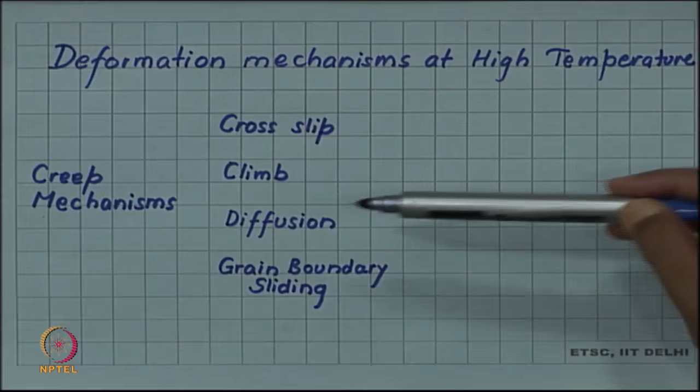4 important mechanisms have been identified: cross slip, climb, diffusion and grain boundary sliding. Cross slip, as you know, is of a screw dislocation, and climb is of an edge dislocation. So both involve dislocation, they are still dislocation based. Just like at low temperature dislocations play an important role, at high temperature also they still play a role in creep.

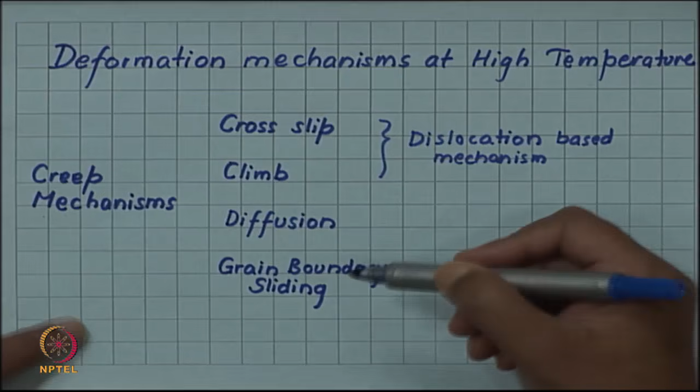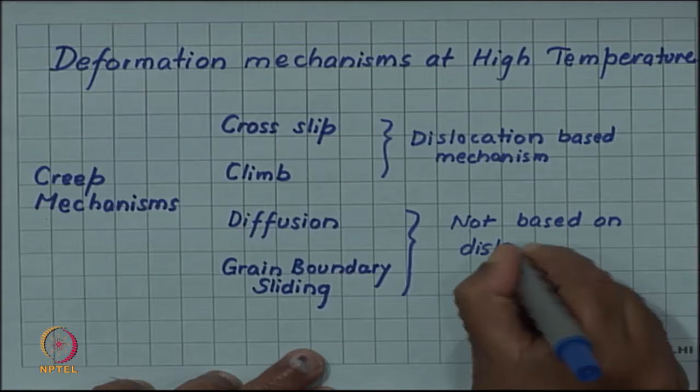But diffusion and grain boundary sliding are 2 mechanisms of plastic deformation which are not dislocation based, independent of dislocation, and they occur only at high temperature and do not happen at low temperature. So they are particularly effective in creep. These are not based on dislocations. So, high temperature deformation need not necessarily be a dislocation based deformation.

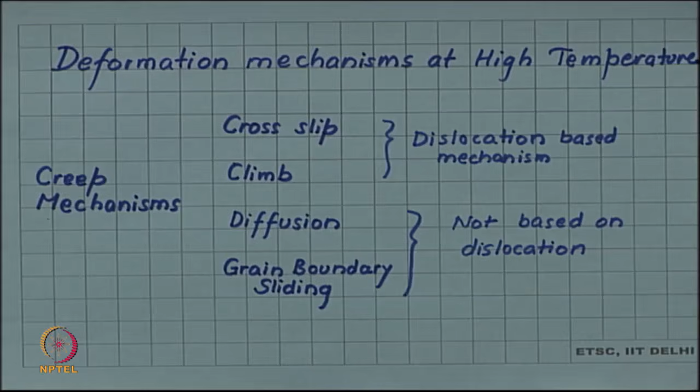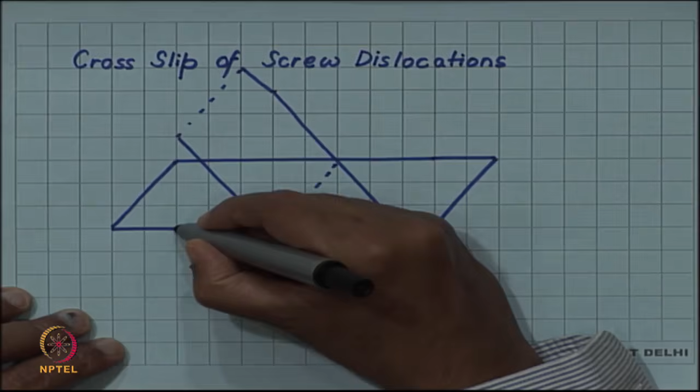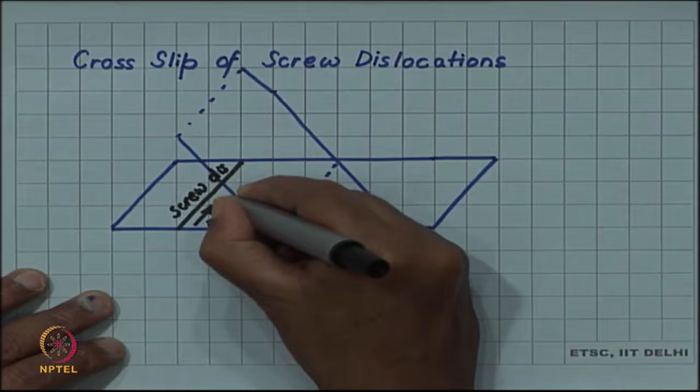We have already seen cross slip of screw dislocations when we were discussing the topic of defects and dislocations. So, let us say that this is a screw dislocation which was moving. If it is a screw dislocation, the T and B will be either parallel or anti-parallel. Let me make it parallel in this case.

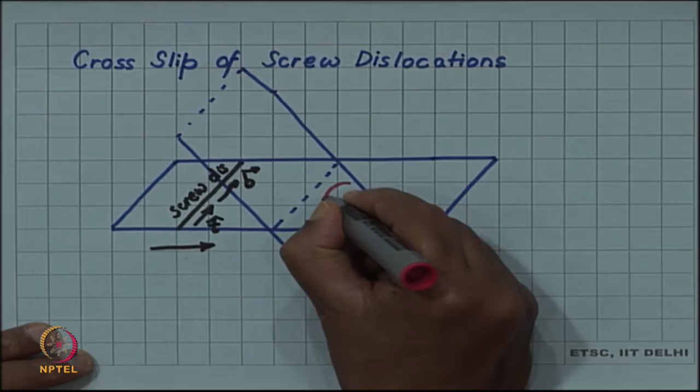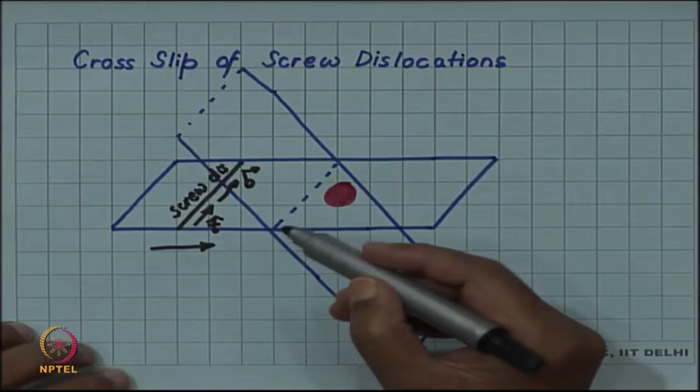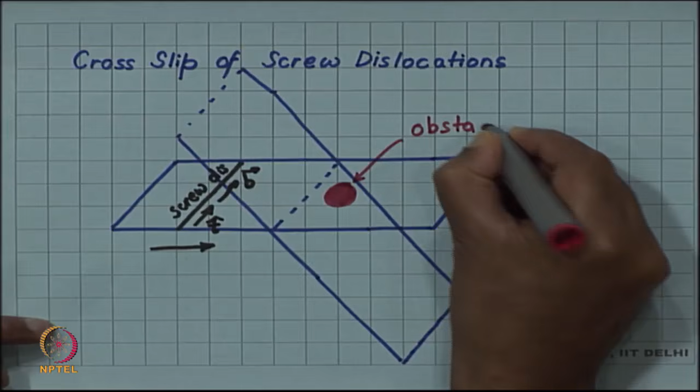So, if this dislocation was moving under stress in this direction, suppose the crystal contains some hard particles, reinforcement or precipitate, as we have talked about in precipitation hardening. Suppose there is a precipitate sitting there and the dislocation cannot cut through the precipitate, so it acts as an obstacle to dislocation motion, let us say a precipitate.

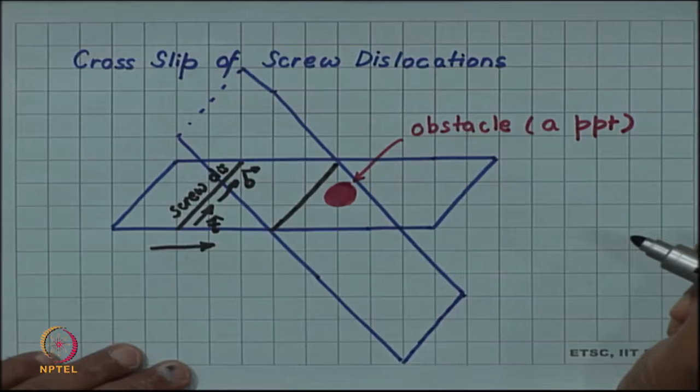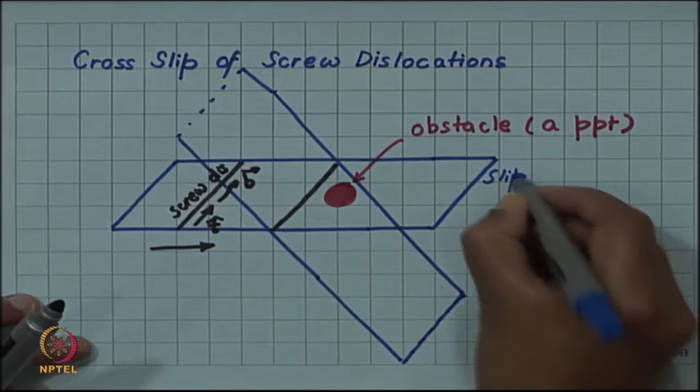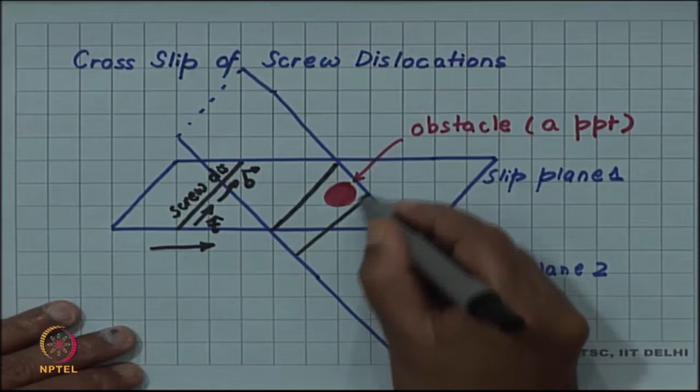So, this dislocation will be obstructed when it comes here, but if another plane is available for sliding, the dislocation can avoid this obstacle, if it is a screw dislocation. This other plane is also a slip plane. So, if this is slip plane 1, and this is slip plane 2, the dislocation can avoid the precipitate particle by starting to glide in this direction. This change of the slip plane is what we call cross slip.

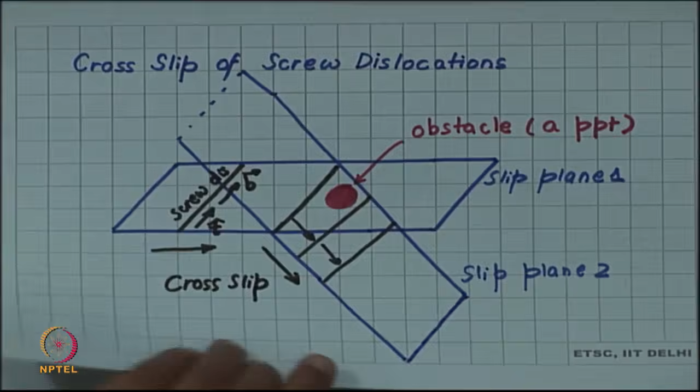So, if cross slip was not happening, the plastic deformation will stop at this point, but if cross slip is possible, then since the dislocation continues to move on a different plane, the plastic deformation will continue.

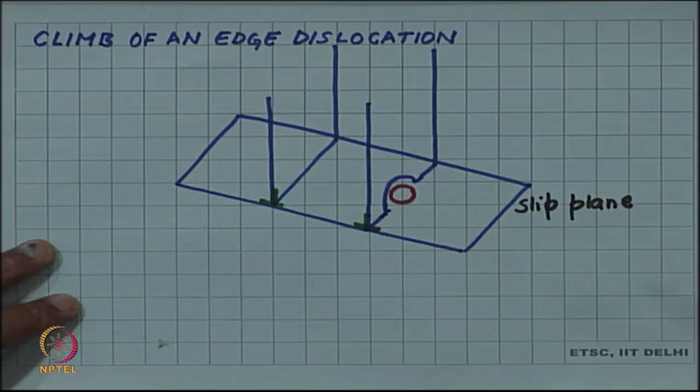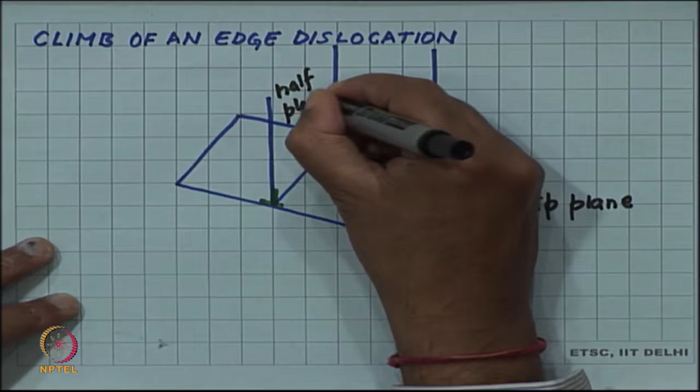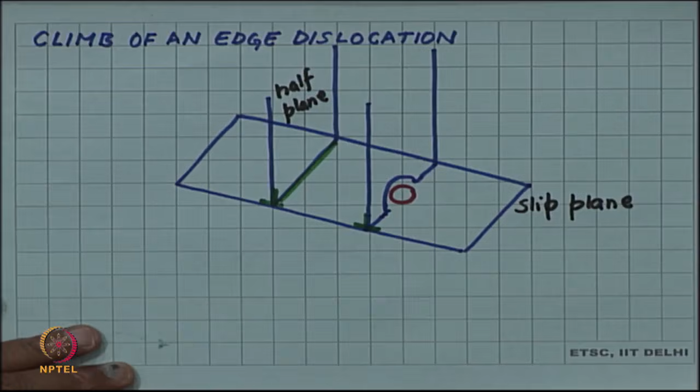Another mechanism is climb of an edge dislocation. We have shown a slip plane here, let us call this the slip plane. This horizontal plane shown here is a slip plane. The vertical plane which I have drawn here is the half plane of an edge dislocation. So this line will be the edge dislocation line, and schematically we can represent it by an upside down T. So, that is an edge dislocation.

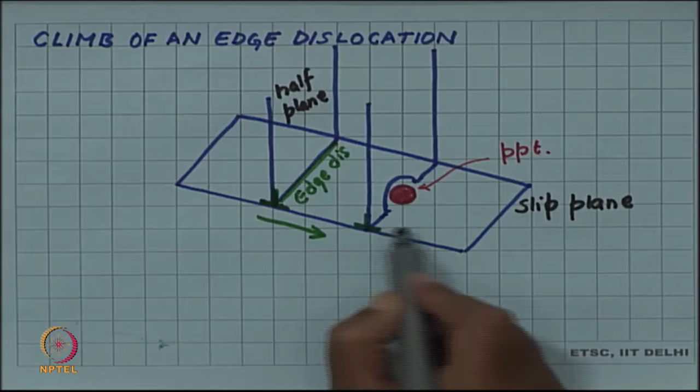And that edge dislocation, let us say, is moving in this direction, and again there is a precipitate particle sitting on the slip plane. Then in the normal situation, the dislocation will be stuck by this precipitate particle and can continue to move only at a higher stress.

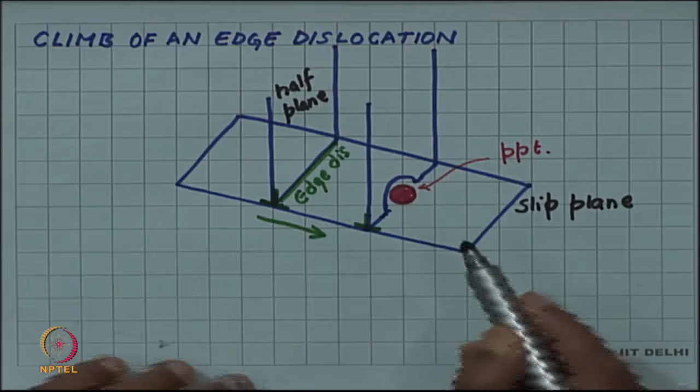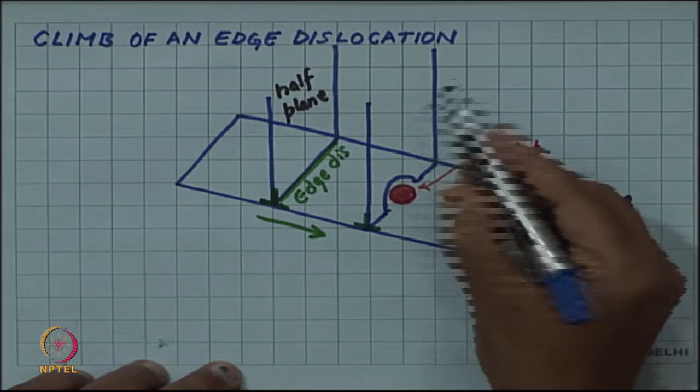We had considered that in precipitation hardening. Either the dislocation will have to cut through the precipitate, which also requires higher stress, or it can form a loop around the precipitate, which again needs higher stress. But if the temperature is high, like in case of creep deformation, then what can happen is that atoms at the bottom edge of the dislocation line can diffuse out.

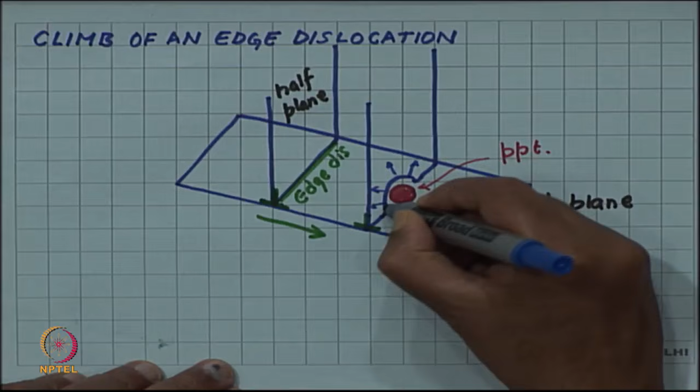Which is what we call climb up. So, this segment of the dislocation line has climbed up, and thus is able to avoid the precipitate, and the dislocation line can continue to move. This does not require any higher stress, only requires a higher temperature for this diffusion to happen.

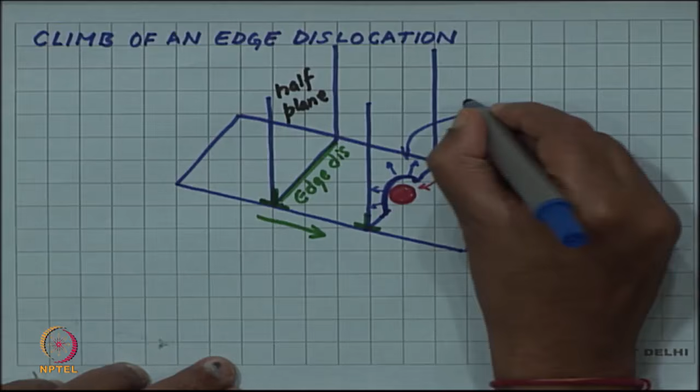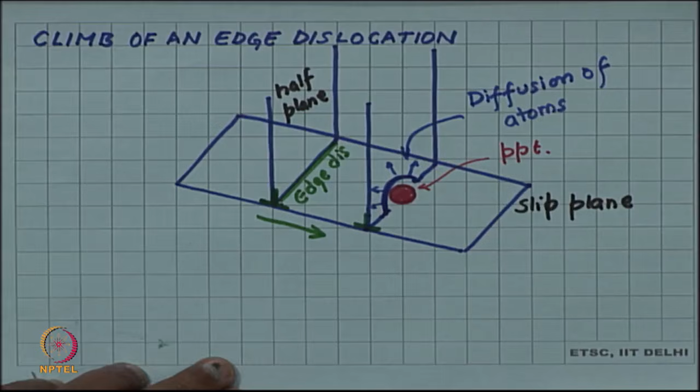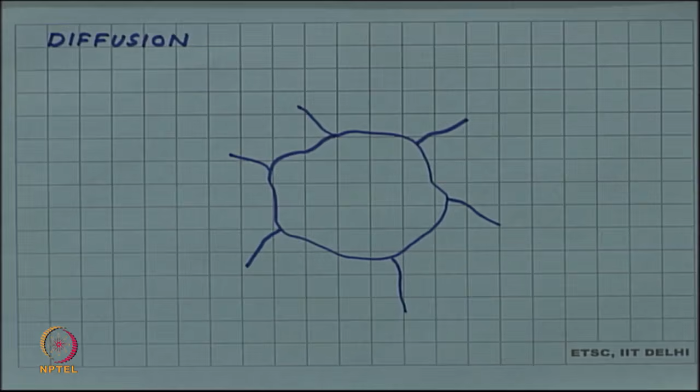So, diffusion of atoms are involved in the climb of edge dislocation. Now, a dislocation free mechanism is so-called diffusion, sometimes called diffusion creep or diffusion flow.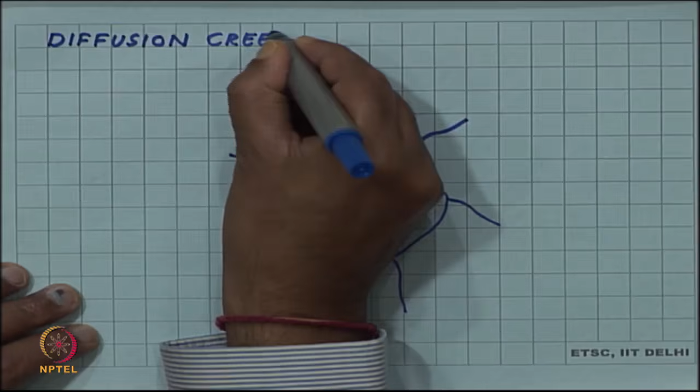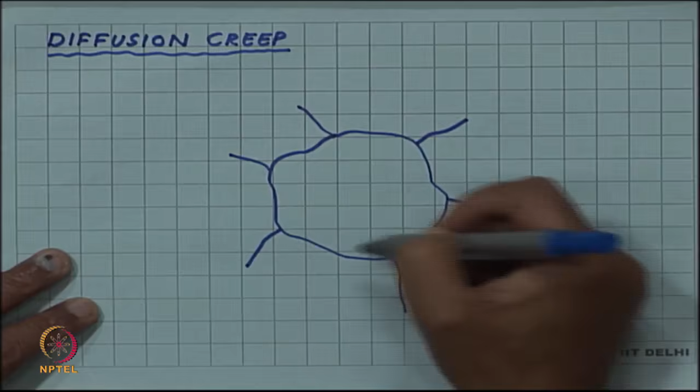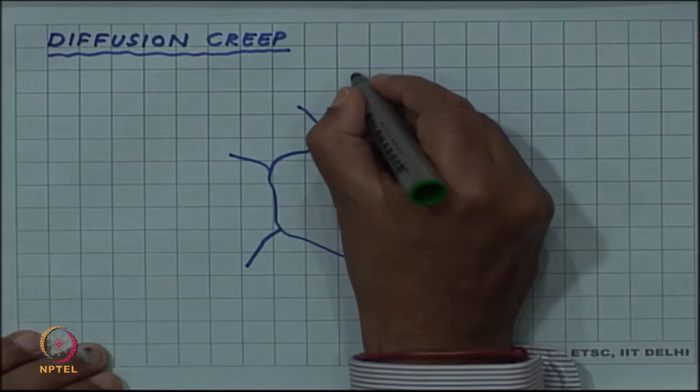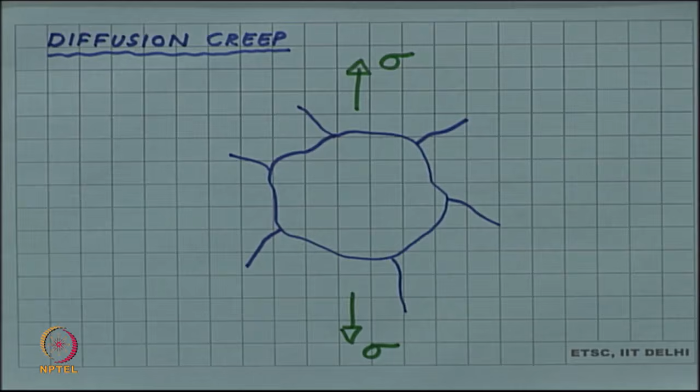So, suppose this is a schematic of a grain, and these are all grain boundaries, and if this grain is subjected to a uniaxial tensile stress, then you know that the grain will try to elongate in the direction of the stress, whereas it will try to compress in the direction perpendicular to the stress. This elongation and compression can of course be obtained by dislocation motion, as happens at low temperature.

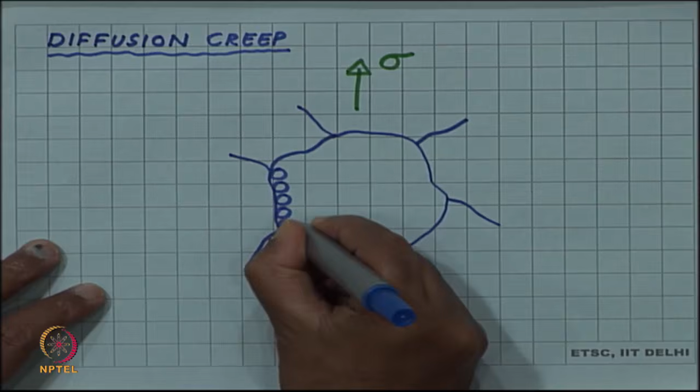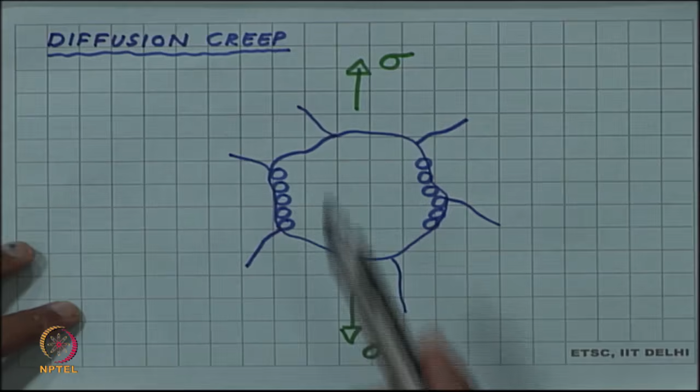But at higher temperature, since diffusivities are higher and atomic jumps are easier, one mechanism which is possible is that atoms which are on grain boundaries parallel to the stress axis can move to grain boundaries perpendicular to the stress axis.

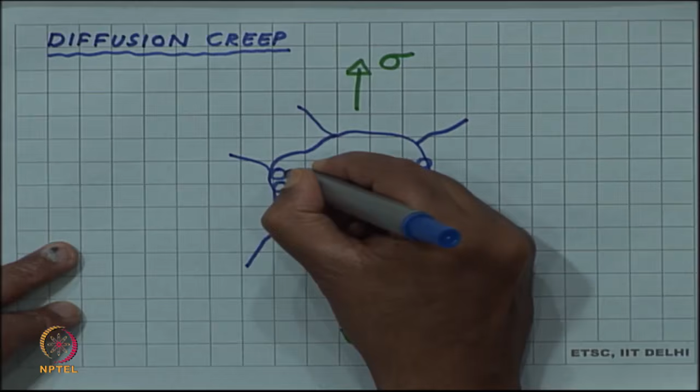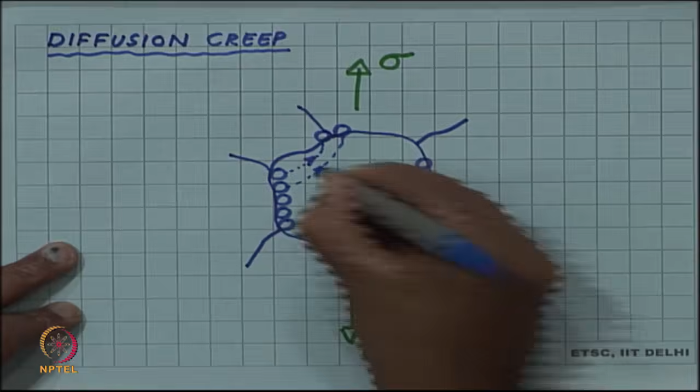So, if this atom moves from here and joins here, this atom moves and joins here, similarly this atom moves and joins here. So, let us say atoms migrate this way. If these atoms migrate and join, then similarly on this boundary we can have atoms which have migrated from this side.

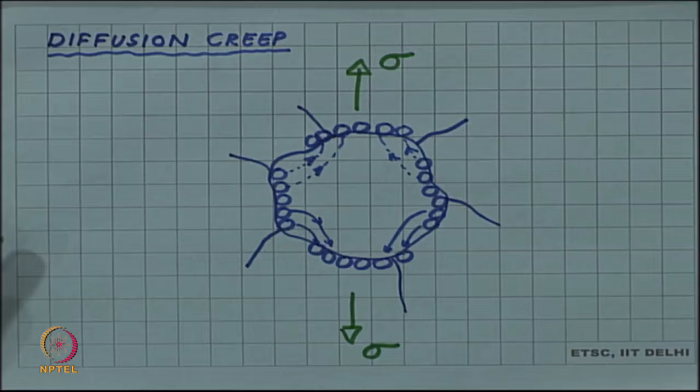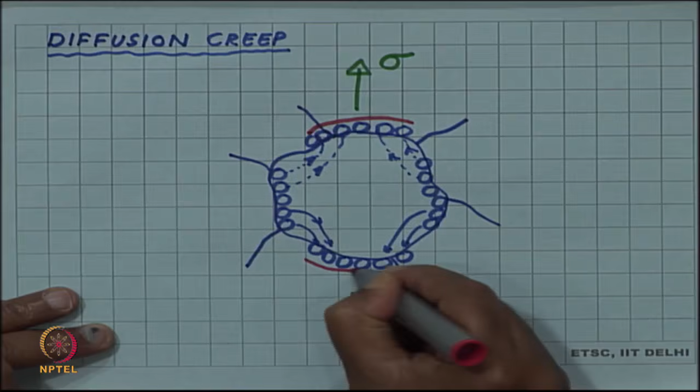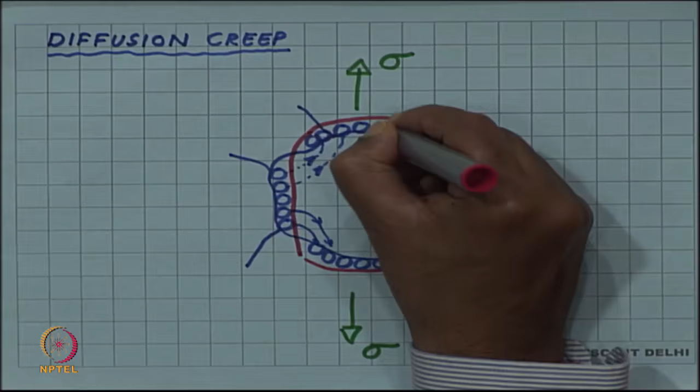So, if this happens, then you can see that the size of the grain is increasing along these boundaries, but is decreasing on this side. So, after the diffusional migration, the grain shape will be something like this, which is exactly what this stress is trying to do, to increase the length in this direction and contract the dimension in this direction. So, this increment in length as well as transverse contraction can simply be achieved if the atoms migrate in this way.

Such migration is not possible at low temperature, but at higher temperature, due to higher atomic mobility and higher diffusion rate, such migrations are possible. This is a diffusion which is not governed by Fick's law in the simpler form which we had talked about.

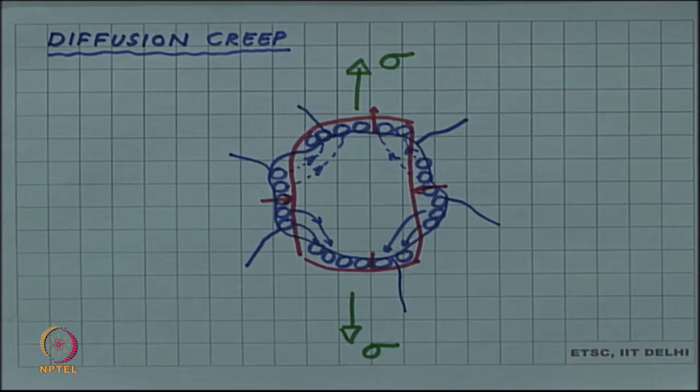That is diffusion due to concentration gradient, because there is no concentration gradient here, only stress is applied. So, this is a special kind of diffusion which we have not talked about earlier, and we are not going to discuss it in detail here either, but we will simply note that this is a special diffusion mechanism which is stress assisted diffusion.

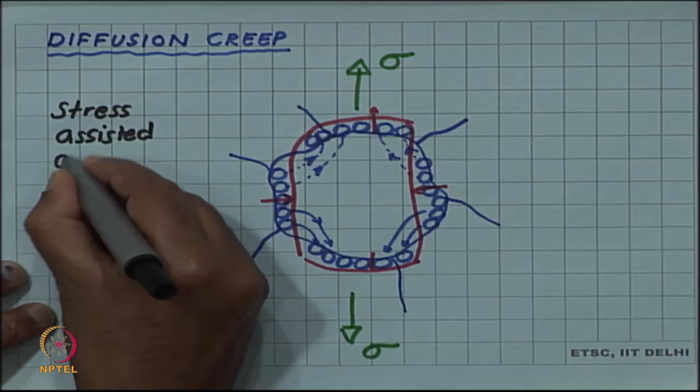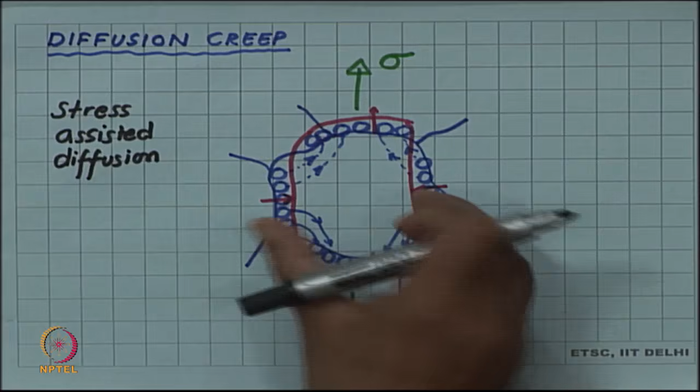So, these diffusion paths which I am showing are happening because the stress is trying to increase the grain size this way and decrease the grain size in this direction. So, the atoms have a driving force for this kind of motion. Obviously, these atoms are atoms which make up the crystal, they are not interstitial atoms. So, these atoms can diffuse only by a substitutional diffusion mechanism. So, the diffusion is still substitutional.

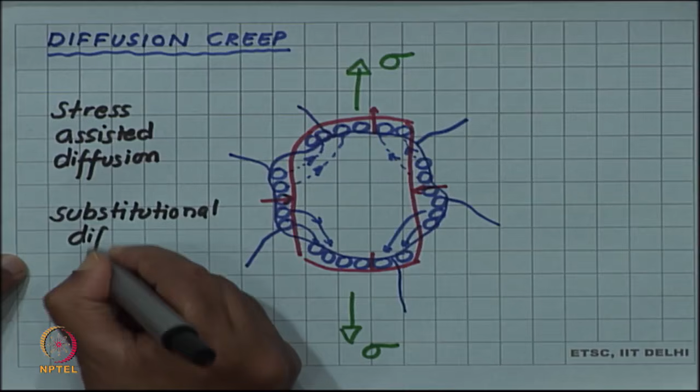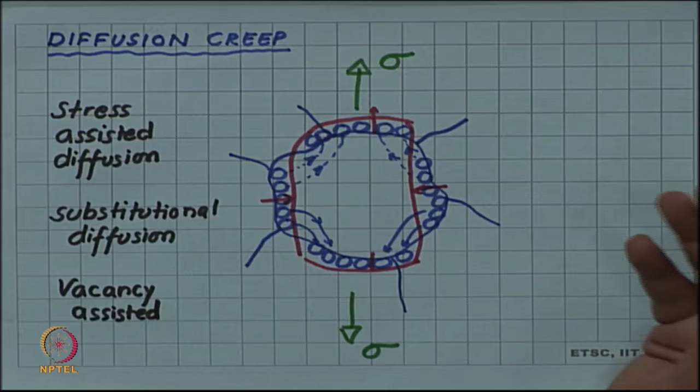And for substitutional diffusion you need vacancy. This is vacancy assisted, and again, vacancies are more available at higher temperature, and vacancy concentrations are higher at higher temperature. So, this kind of diffusion is more possible because of the higher temperature which is available during creep.

So, if we try to put the path of vacancy, if we do not look at the atoms, but look at how the vacancies are migrating, you can see that the vacancy will migrate just the opposite way.

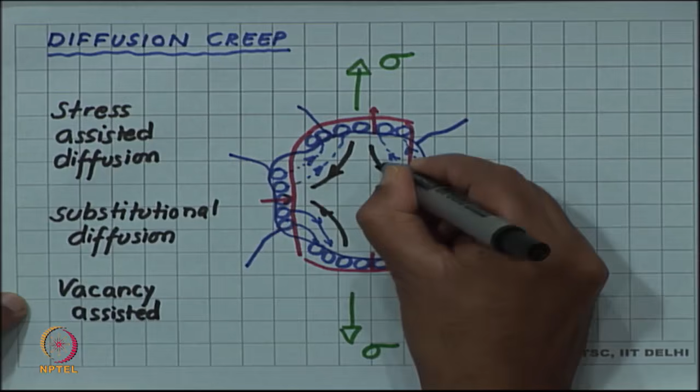As you know, if you have a vacancy and an atom jumps into a vacant site, let me draw it like this: this atom jumped into this vacant site, which means the vacancy that was there jumped in the opposite direction. So atomic migration direction and vacancy direction are different, and this stress assisted diffusion leads to vacancy migrating from

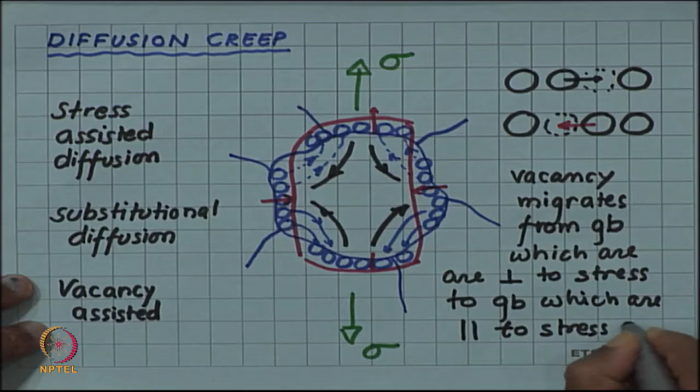grain boundaries which are perpendicular to stress, to grain boundaries which are parallel to the stress axis. So this is stress assisted diffusion of vacancy which leads to diffusion creep.

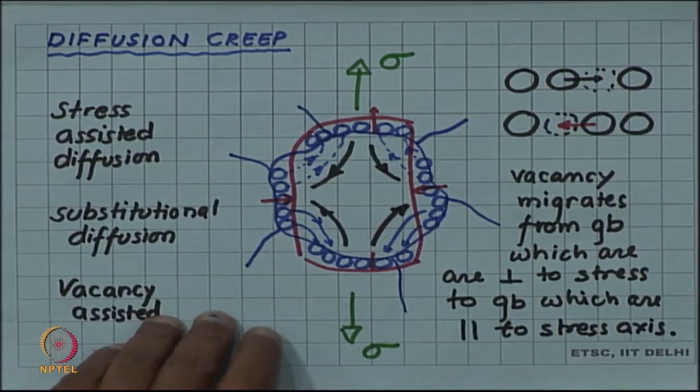There is no dislocation required, but if vacancies move this way, the atoms move the opposite way and the deformation will happen.

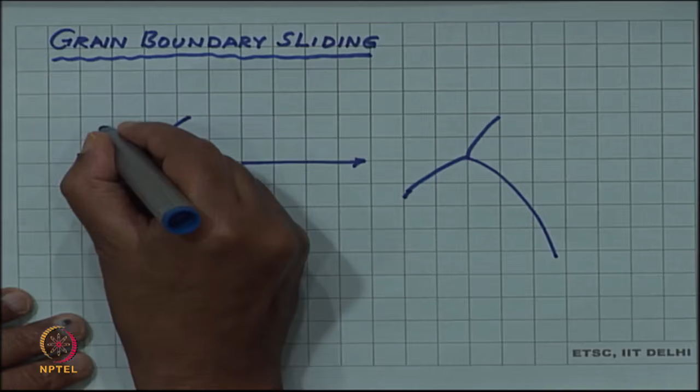Yet another deformation mechanism which does not involve dislocation is grain boundary sliding. This again happens at higher temperature. Here I am showing you a schematic of, let us say, 3 grains: grain 1, grain 2 and grain 3, and these are the grain boundaries - grain boundary 1-2, grain boundary 1-3, and grain boundary 2-3.

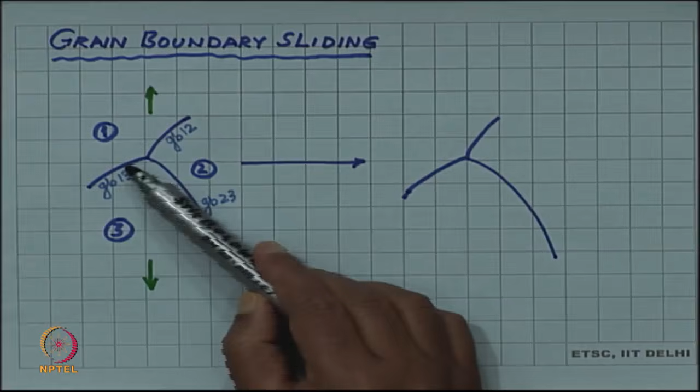Now if this system is subjected to stress, then at higher temperature grain boundaries become weaker than the grains. So they act somewhat like a viscous liquid along the grain boundary. Liquid is a little strong a term, but it becomes easier for the grain to slide on these grain boundaries at higher temperature under the influence of stress. So if shear stress is there on these boundaries, the grains can slide.

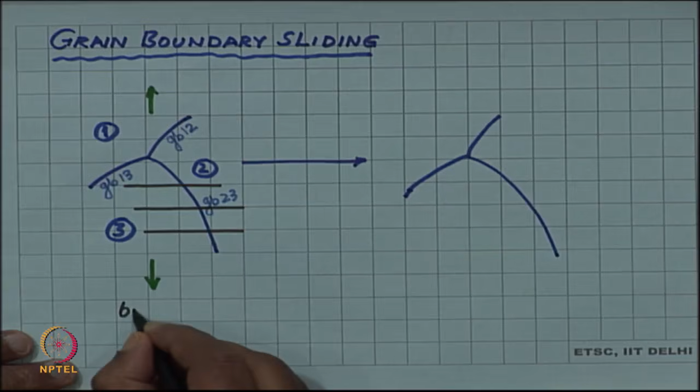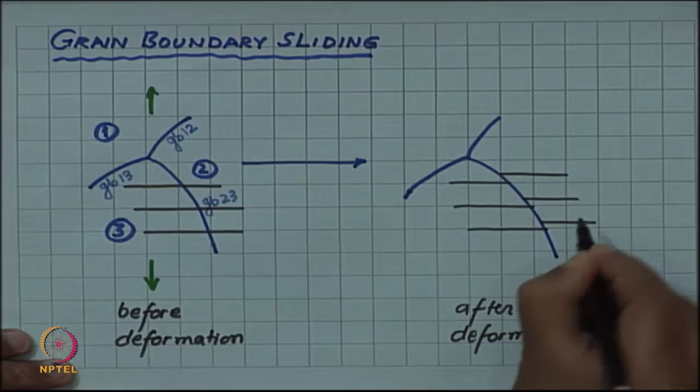This has actually been observed in experiments by drawing some test lines across the boundary. Suppose I draw a test line across this boundary before deformation, continuous across the grain; after deformation, one finds that these lines have become discontinuous. The continuity across the boundary is lost, and you find something like this.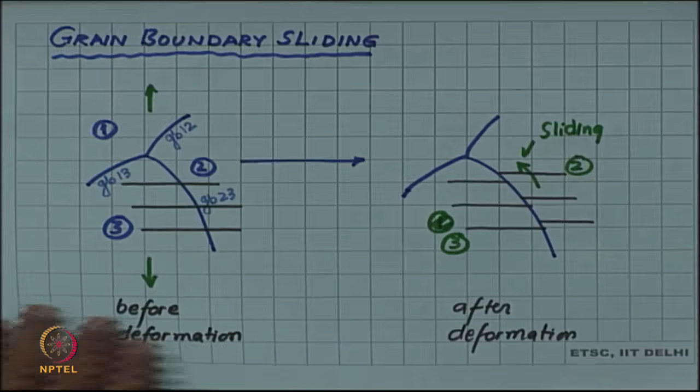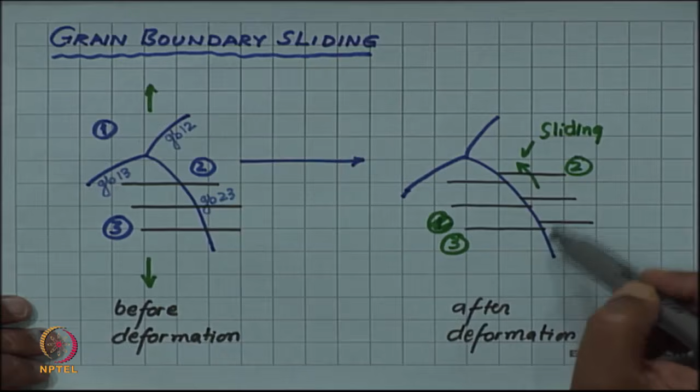Which means grain 2 has slid upwards with respect to grain 3 across the grain boundary. So grain 2 and grain 3 are sliding on the grain boundary 2-3. This is yet another mechanism which is possible, and again it is possible at high temperature, because at high temperature the grain boundaries become weaker and allow for this kind of sliding.

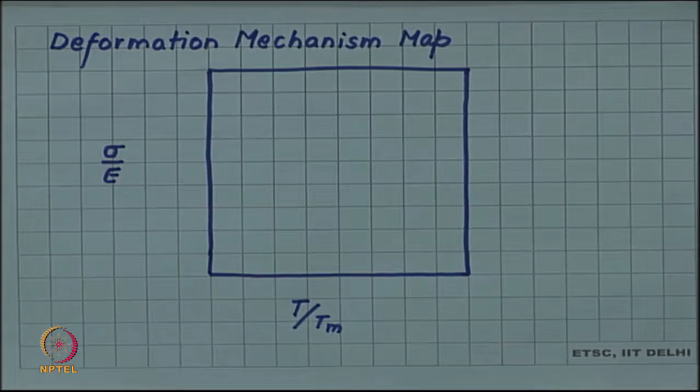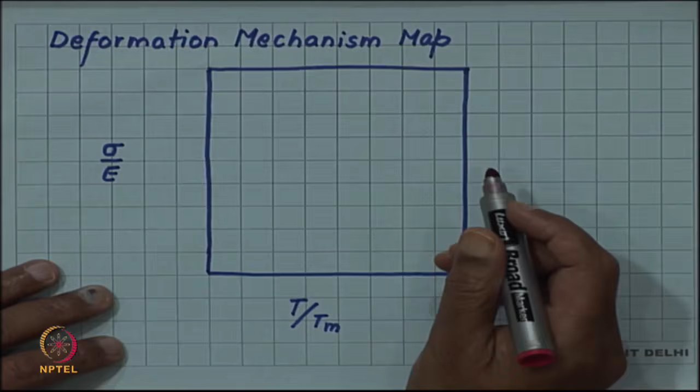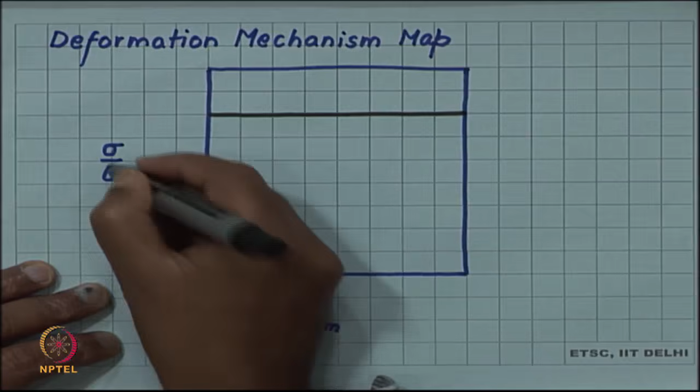Finally, an interesting way to present deformation as a function of stress and temperature is what is called the deformation mechanism map, and a simpler form of this map is what we will draw now. So we have something called yield stress: the y axis is stress normalized with respect to Young's modulus, and the x axis is temperature normalized with respect to the melting point.

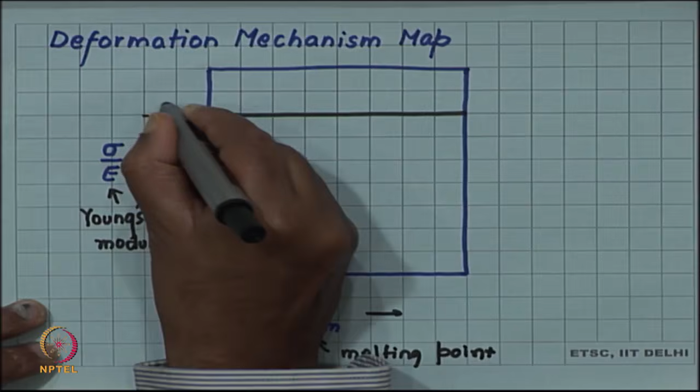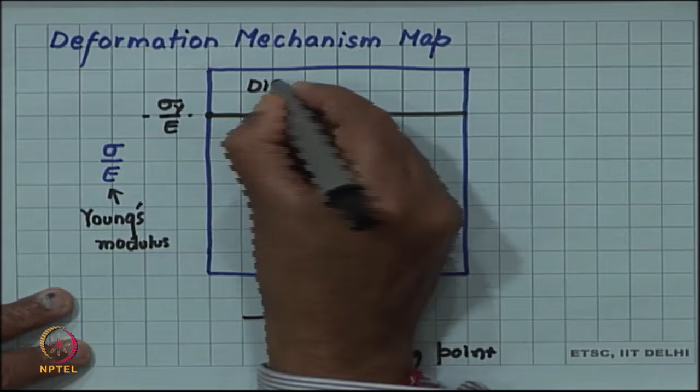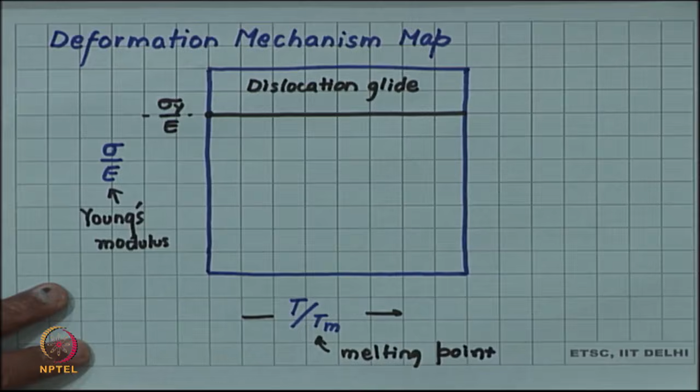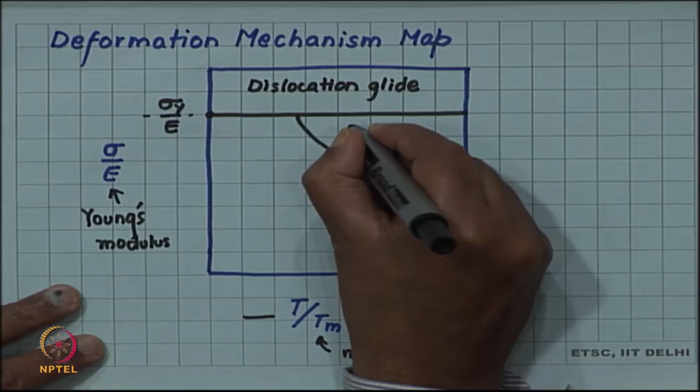At a value corresponding to yield stress, sigma y by E, the yield stress will be reached. At that yield stress you will have plastic deformation, due to dislocation glide. Then at higher temperature you have different regimes - the dislocation climb or dislocation based creep which we talked about is here.

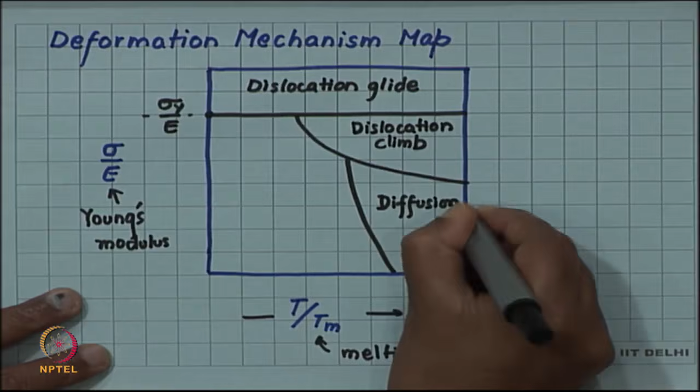Whereas diffusion based creep, which we talked about, is here. And in this regime, on the lower stress side and the lower temperature side, the deformation is still elastic. So this is an elastic regime. As you increase the temperature at constant stress, you will go from elastic to plastic deformation at some higher temperature, because diffusion based mechanisms will start to take place.

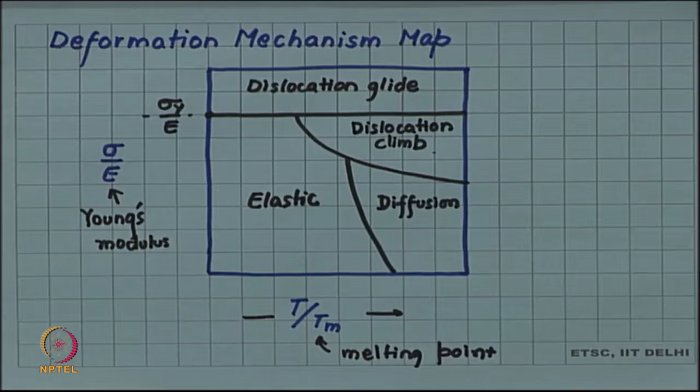If the stress is high, then you can go into the dislocation climb mode also. So this regime, the dislocation climb and diffusion regime, is the creep regime, and the glide regime is normal plastic deformation, and the rest is elastic deformation. So this kind of deformation mechanism map can help in understanding the various mechanisms of plastic deformation as a function of stress and temperature.